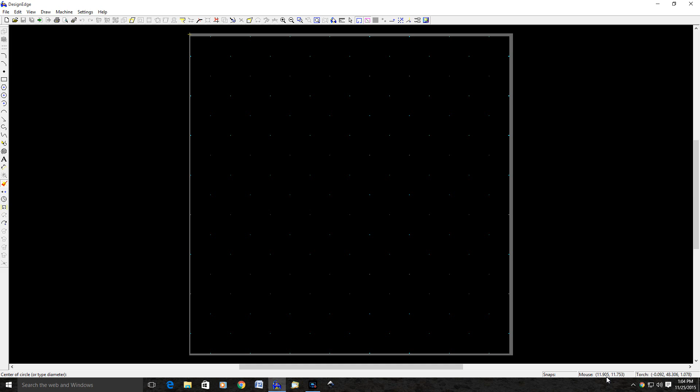Okay, all right, first off we're going to start out with a circle. So we click on our circle here, and we go ahead and type in 2 inches and a 32nd as far as diameter, and we're going to go ahead and put that down on the screen.

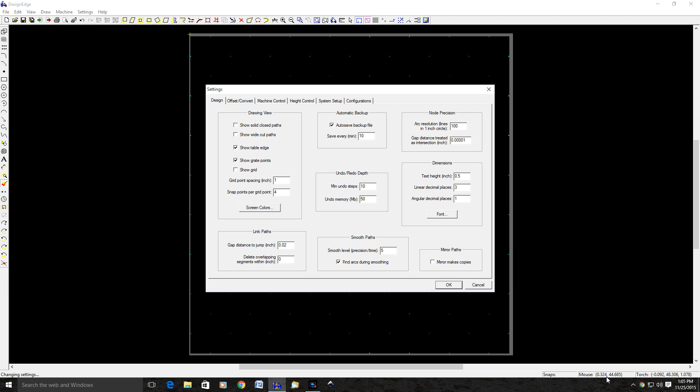I'm going to go ahead and go in here in my settings, and I'm just going to come out to design, and I'm going to unclick show closed paths, so this will just give me the lines for right now. We'll show the closed paths when we get a little bit closer to finished product here, because it does swap back and forth, and it looks confusing sometimes while you're going.

All right, I want a node to center that, and I just push center, and it creates the node in there. I'm going to marry those two together, or create a match, so that when I highlight one or the other of those two items, the node or the circle, I actually have them together. All right, that gives us our diameter.

Now the depth of our socket, the depth, how much we want to come down over that socket, and we can just, I'd say 2.5 inches is probably good. So let's create a square that matches that circle.

First point is always 0,0. And then we'll go ahead with the width, which is going to be 2 inches and 1/32, by 2.5 on the length.

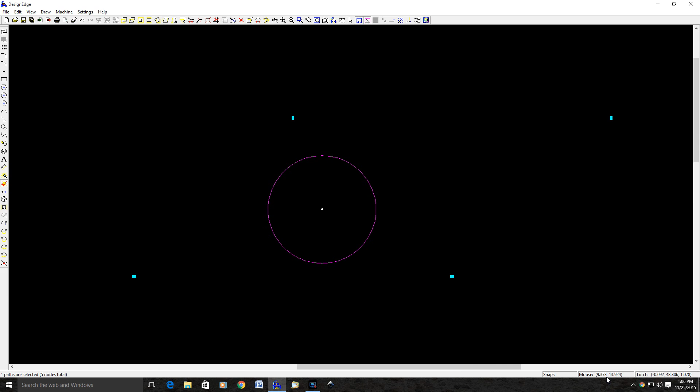All right, now we come out here, that's where our square is, and we're going to just bring this up close to our other item. We're going to put a node in the center of the box.

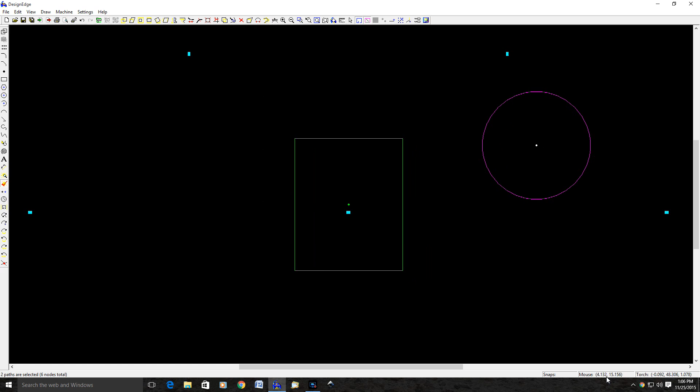And then we can marry those two as well, and then we can line up that with this project here by lining up the nodes. And you can just zoom in and line those up.

If you had an X and Y coordinate, you could also put that in there, but this is just quick to go ahead and zoom in, a couple clicks, and you're going to be ever so close right there.

I mean, we're making an auger, okay? Now you can see that the center of the box is not really giving me the total depth of that. I need to bring that clearance on down there. So I'm going to go ahead and move that down.

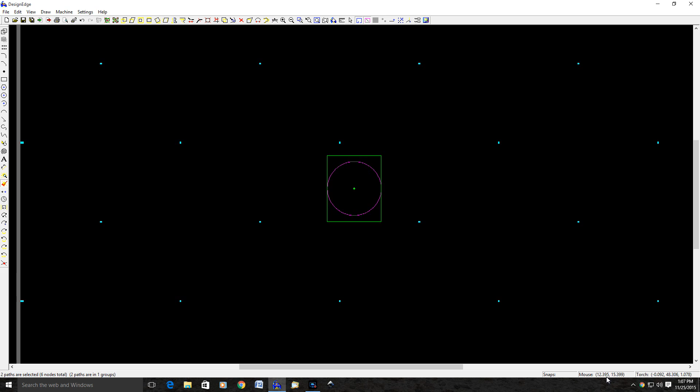And I'm going to bring it down here, but I'm just going to go ahead and slide it side to side until I know I'm matching up with the lines. There we go. All right, and then we just kind of zoom in and make sure that's lining up there. That's lining up there.

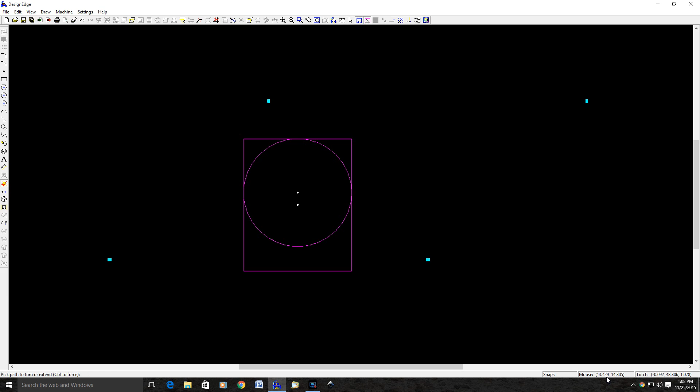All right, now to double test that there, let's go ahead and trim off this. Okay, trim off that, trim off that.

We can marry those together. Now we have one closed loop there. We have one green spot that's left up here. We can get rid of that. That's a closed path. When you've got your purple and it turns green when you highlight it, that is a closed path. And that's what we want for right now.

Now, that's our inside there. This is going to be open at the end, but we have it boxed off right now just so we know we have security on our radiuses around here.

All right, now we need to go ahead and duplicate this basically in a larger piece altogether. So we can copy this, put it over here, and we can go size on that, and then we can size this whatever size we want.

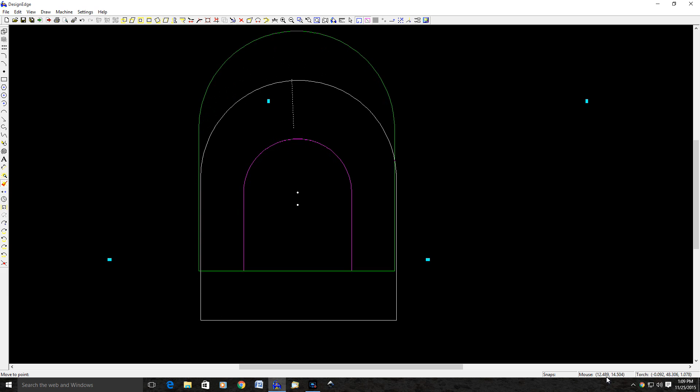Then move that over this. We can also move this down. We keep the wall thickness pretty close to the same up here at the top and side to side. We can even bring it down a little bit more if we wanted to.

All right, that's pretty uniform. But let's go ahead and give it just a little bit more at the top here, because we're going to be cutting out of it to put that socket in there. And I kind of like that right there.

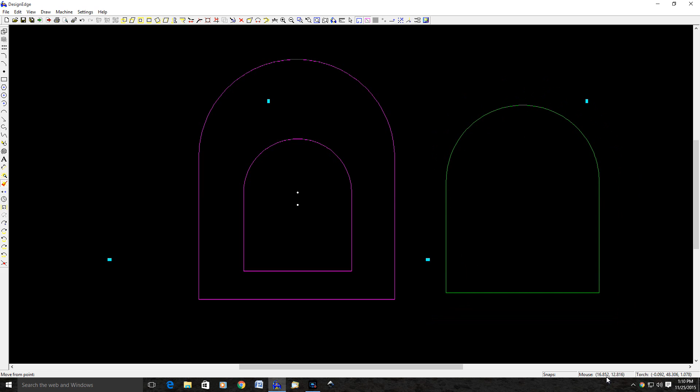Now our quarter inch plate that's going to sandwich around the side is going to be somewhere between that inside dimension and the outside dimension. So I can just copy another one of these and size it down somewhere in there, move it over here, and also size it up while I'm in here, so I know I'm going to have a nice weld bead along here, and it's going to hold it pretty good. I kind of like that.

Alright, let's go ahead and draw a line. You can punch in the coordinates of a line, or you can actually draw it, hold it until it is straight, unbroken, and it actually creates a solid line level.

Alright, I had a little interruption there, but I'm right back. The line we created will give us a break line that we'll be able to move across all of our pieces right here, so that we can create an open bottom, basically what we're doing.

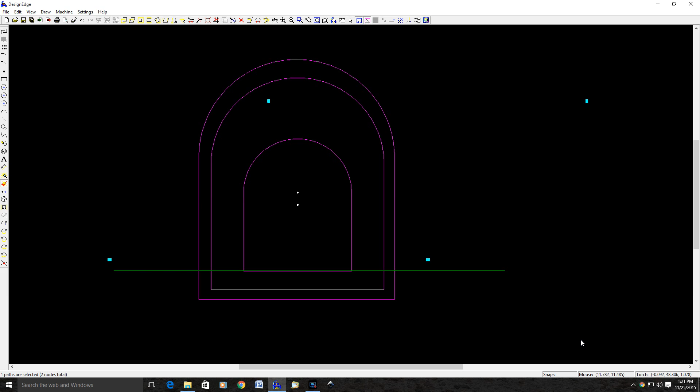So we laid that over, and you can see I'm slightly above that line, so I know I'm crossing all over here. I'm keeping this simple so we've got our pieces. All of our pieces are right here now, with the exception of not fitting our socket in here at the top. So let's go ahead and measure our socket.

We're basically about 800 on the width, and we want to go three-quarter inch deep, and 850 on the width should give us enough.

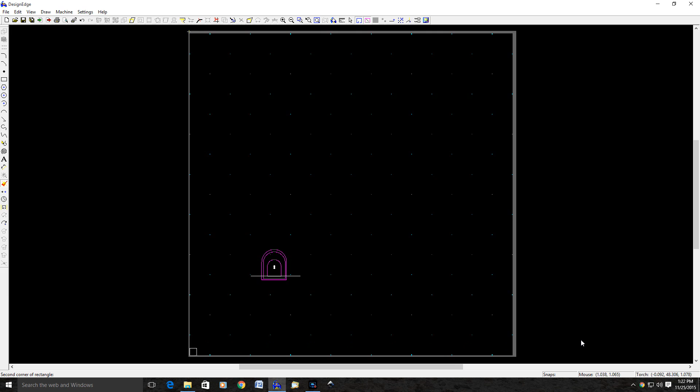So let's create another box. 0, 0, enter that, and this just pinpoints at the corner, and that's how your box is. So it gave us that center point no matter where it is.

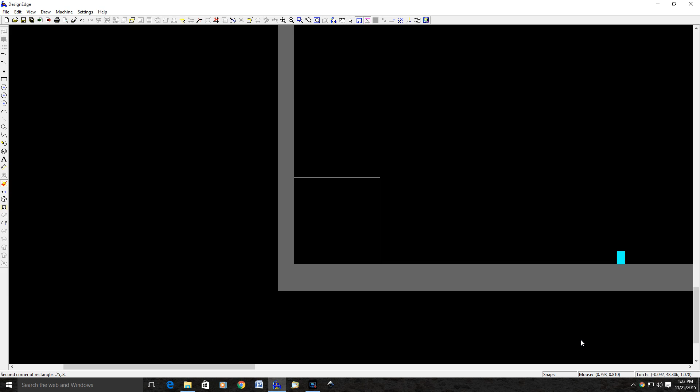Now I'm just going to type in the rest, and we're going to go three-quarter on the width, and what did we say? We said three-quarter on the width, 850. 850 on the width and three-quarter on the height. Type it in right.

Alright, there's our square now. Now we can go ahead and move this up to the top of our center here.

And if we go like this and put a node in the center of that, there we go, and we marry that together, then we can go ahead and draw one last line here vertically.

There we go, and we move that on over here. Now we wanted to line that up basically with our center, and I'm just grabbing one of those nodes and bringing it over here, eyeballing it to where I know it's close enough. For the tolerances we need for a welded impact socket, we're doing great.

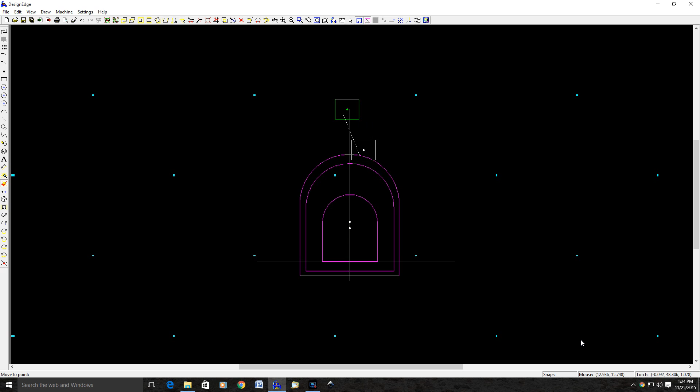Alright, let's move this down here now, and I want to line that up in here. I'm going to leave this protruding outside this corner here. It makes it easy to go ahead and trim lines. Alright, now we've located where our socket is going to stick down into the top of our holder here.

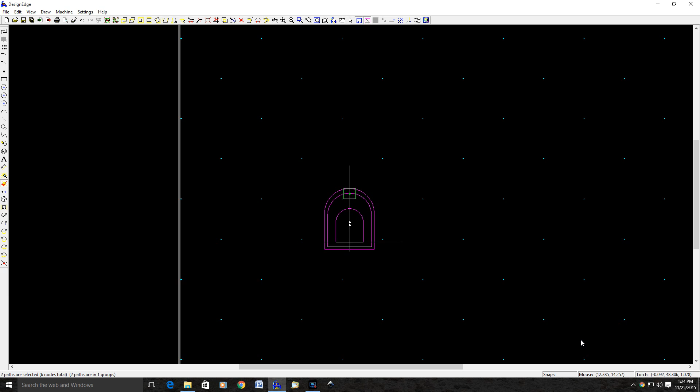Now let's go ahead, I'm going to zoom in on this whole picture here, and I'm just going to grab my scissors up here, because this lets me trim off what I don't want. First off, this vertical line serves no purpose for trimming, so I'm going to delete that.

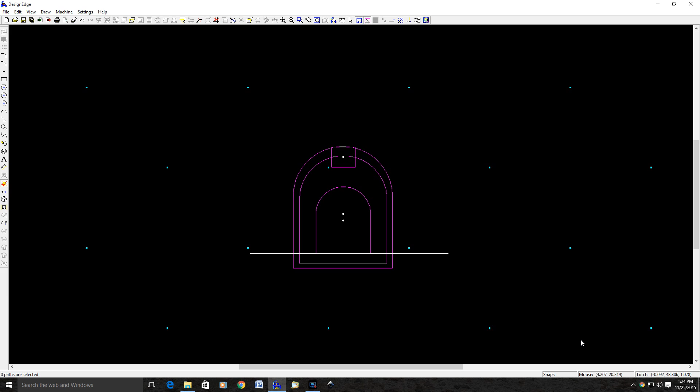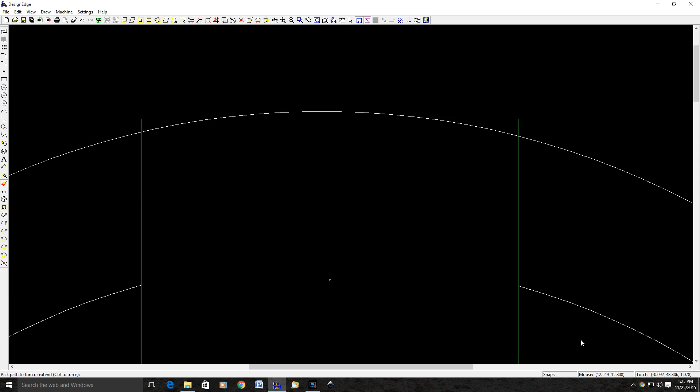Now I can grab my scissors, and we'll start right down here at the bottom. We're not going to need that line, or that one, or that one. All of it's open here, that's open, that's open. We're not going to need that one, or that one, or that one. That one, that one, all of those.

Alright, before I cut anything else loose, I'm going to go ahead and grab those and delete those. Delete that.

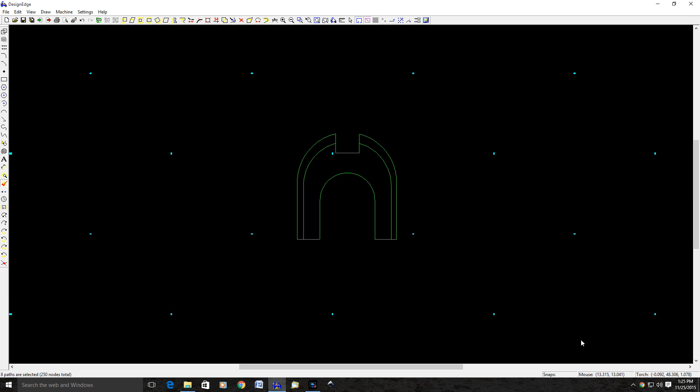Okay, I want to pair this, copy this before I delete anything else, because we're going to have two drawings used out of the same thing here. One is going to be our outside shell, the half inch thick, so we will go ahead and finish cutting that out. Actually, we can just delete that line, delete that line.

And that's our 1/2 inch piece. Now we need the 1/4 inch pieces, which are going to be deleting the outside. We're going to go ahead and delete that, delete that, trim that, trim that, trim that, and the last one there.

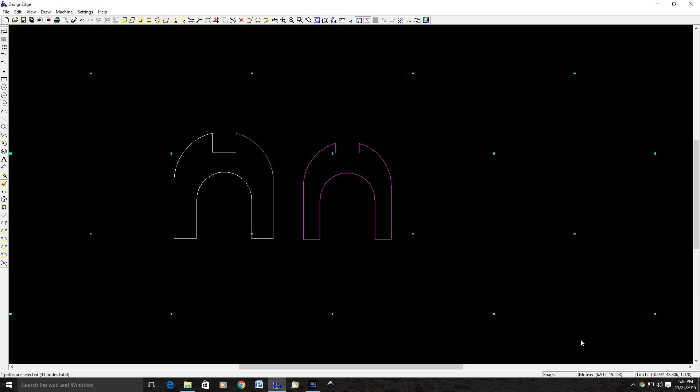Now we're going to marry. I have one piece of this whole thing highlighted, so I can hit marry. There's that part, and I can highlight this one here, marry there. There's our two parts. This is going to be 1/2 inch, this is going to be 1/4 inch.

All right, so let's get our materials set up. Now we need to create cut paths, and that's as simple as coming up here and going convert to cut path, and depending on where we want to go ahead and start, I'm just going to start down here on both of these here.

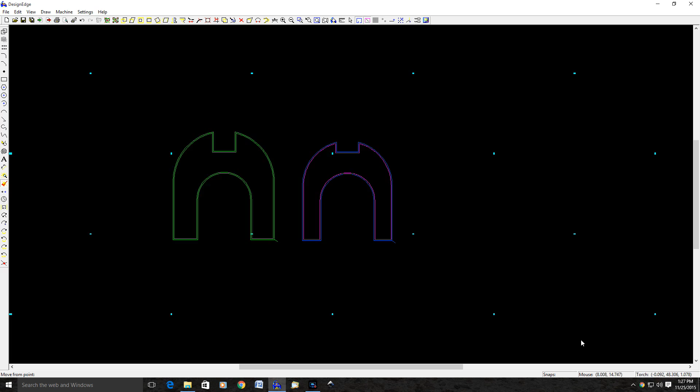I'm going to marry that so that the cut line and the part itself stay together, both of those. Now when I grab it and I move it, it moves together. Let's go to the table, and we're going to start playing with setting up our material there. Then we'll come back and set our cut path in relationship to the table, and then we'll get cutting.

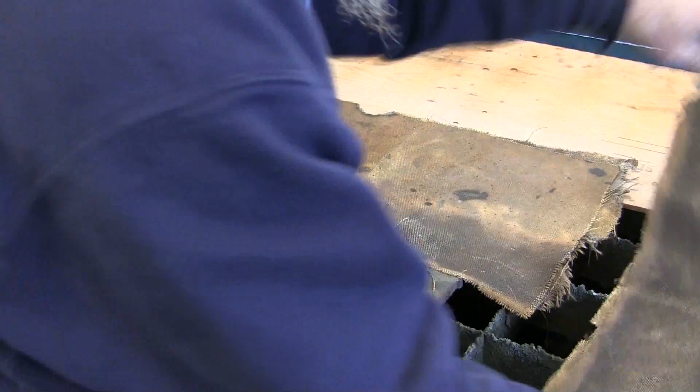Alright, I got a piece of 1/2 inch up here, and I got a piece of ply. I put the plywood, and I use these old curtain pieces that I trimmed off of a curtain after I used it to blanket a part for me. All I do is use those to control the draft, so it focuses the draft of where the cut is. Most of the time I can just run my lower blower and not add the noisy one on the starboard side here.

Alright, we're going to go ahead and cut out our piece, and I think I might just put it on over here into this corner here.

We do need to add a ground. We're grounded through the table, but sometimes through dross and roughness and just little pinpoints, you don't get a really good contact. So I always like to add an extra ground. It's added at and where the ground comes and mounts to the grill, like you're supposed to when you assemble a PlasmaCAM. This is an accessory, and it lays into the trough, and I keep it out of the way so it doesn't drape over any of the areas that the PlasmaCAM travels or would crash into.

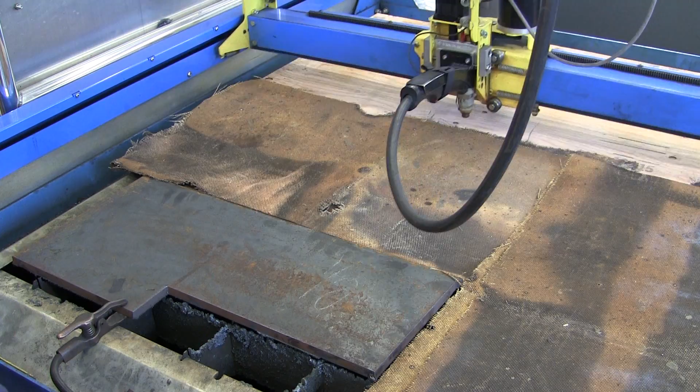Okay, now you want to know how I go ahead and put a piece of material on the table. I can bring the cutout and put it in place, or I can put the cutout on the table if it has to, and then move the material around on the table to cut it out. But what I normally do is come on down to where my material is, and I'm going to mark this lower corner down here. Roughly, give yourself an extra 1/8 of an inch of material so you know you're inside.

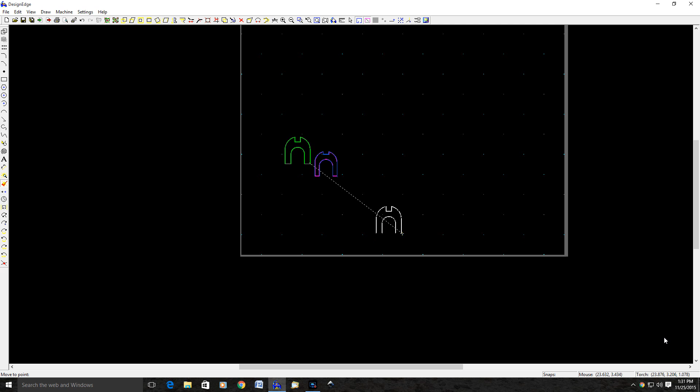All right, now we're on the screen here, and we bring this part. We can click move, and then we can bring that part right on down here, and set that in that location, and we know that we're going to go ahead and pierce and come in and cut that material. Now it's a little bit close to this outside edge, and it's going to cut clockwise around this part. Then I come down here, it's going to be cutting down a really skinny part here.

And I want a little bit of strength on the outside. I don't want it to be so close to the edge. So I'm just going to give myself a little bit more over here, like that.

Alright, now we need to go ahead and go into our settings. We got to set the thickness of material. I've been cutting out those plant hangers and they're all 100 thousandths, so we need to step up here about 500 thousandths, and we want to go ahead and set auto shift, zero shift and auto arc voltage, so it controls the height control and all of that. And I know on 1/2 inch, the cutting is probably down around 20 inches per minute, does a pretty clean cut, I believe.

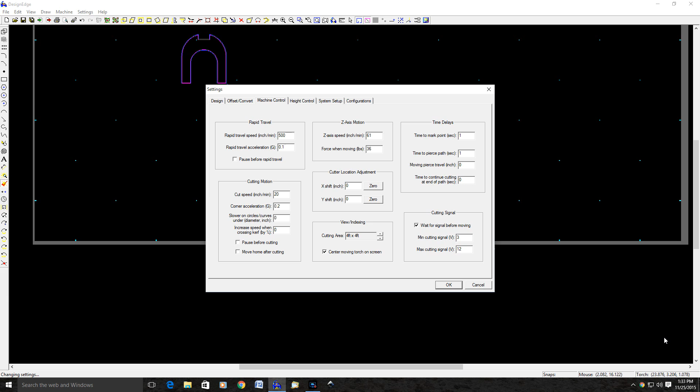And let's just go back. I want to make sure, because I actually carry a little bit lower height on the thinner gauge, and I want to go ahead and raise it up a bit. I kind of like about that. Let's give that a shot there.

Alright, so a lot of it's by memory. I mean, you can jot notes for everything that you've ever cut, and sometimes, depending on if you have a new consumable in there or an old consumable, it makes a difference. Or if it's dirty on the surface, clean on the surface, there's a lot of variables, but we're going to give that a shot there. Alright, so let's get some power here.

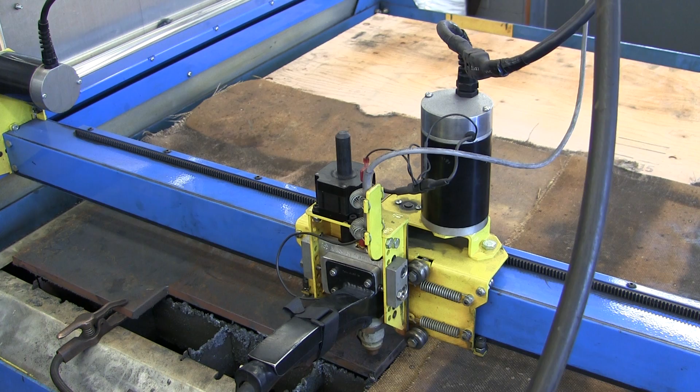And our airflow's on. Now, I'm just shutting off my auto cutting, and I'm going to click start. This will go ahead and run it through - that's where the pierce will be, and it's going to run through its whole program. I can speed this up since I already know where it started, so we don't have to run through the whole test. I'm happy with that, so we can close that out.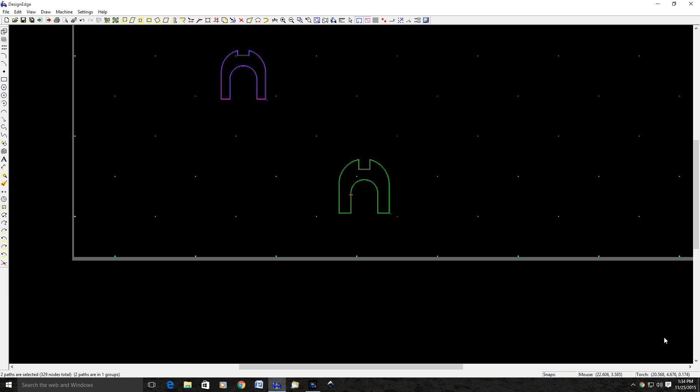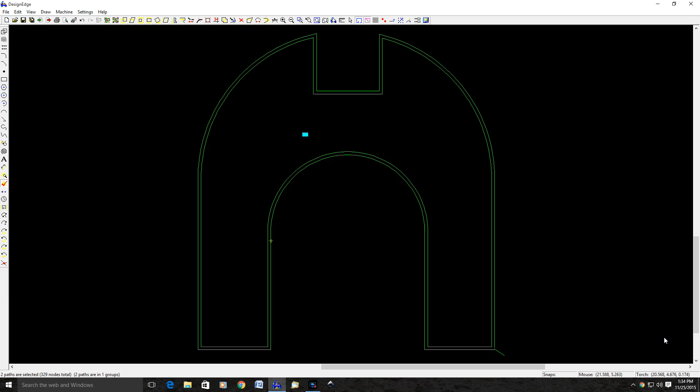Alright, now I'm going to come in here because we can focus closer on centering that part, and the part cut on the screen will follow the cut as we're going. I'll turn the auto back on. We'll give a little ventilation on one side there. I think that should be adequate for your viewing.

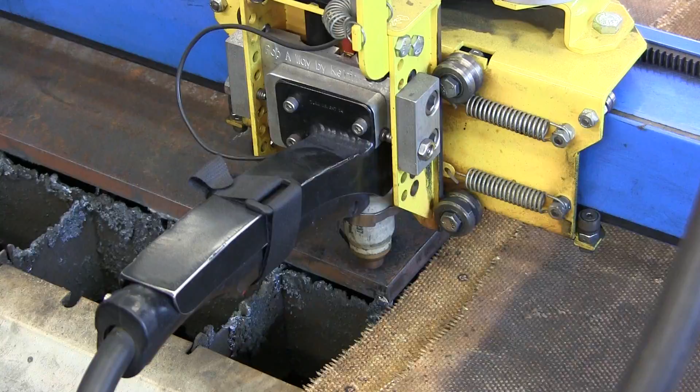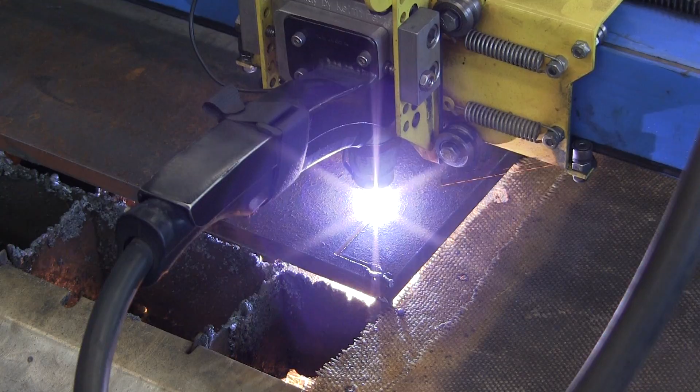Now I'm staring down in there, and that 20 inches a minute really does leave me a good finish. That's a little socket area.

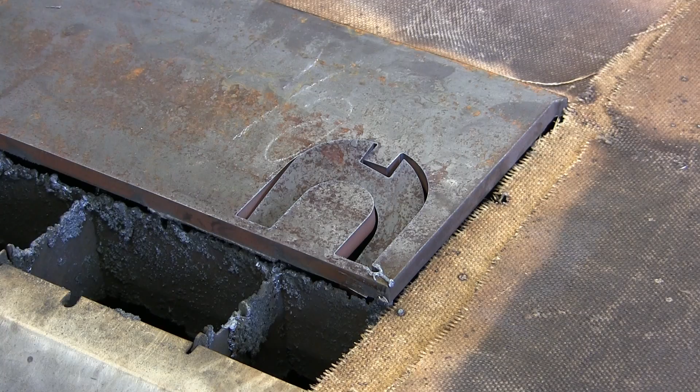Excellent. Okay, bring it up. Move it back out of the way here. Alright, I'm just going to reach in here with a magnet, I think. There we go. Okay.

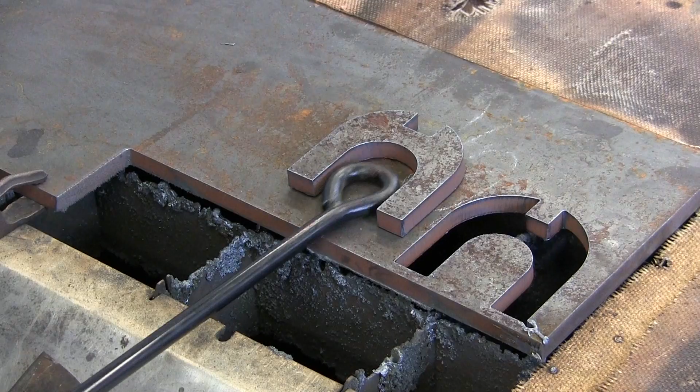Okay, that's it. That's going to be a nice fit right there. We did good. Alright, here's the socket - that looks dynamite.

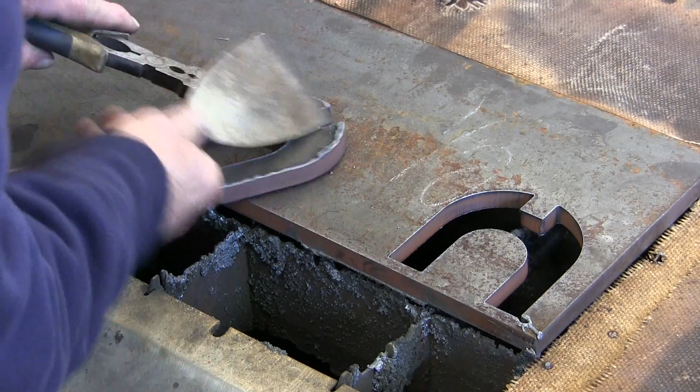Alright, let's see what we got. Not too much dross on the back. How does that chip off? Does that chip off pretty good? Oh yeah.

Okay, I like that. Now let's go ahead - I'm going to put a piece of 1/4 inch up here, and we're going to cut the other two pieces and get this welded. I'm really anxious to get out there and give this a try in the ground.

Alright, we're getting ready to cut out our two 1/4 inch pieces. We got the material up on the machine, we got the ground on. Alright, this is our drawing. We moved it down - there's where our cutter is in relationship to the table.

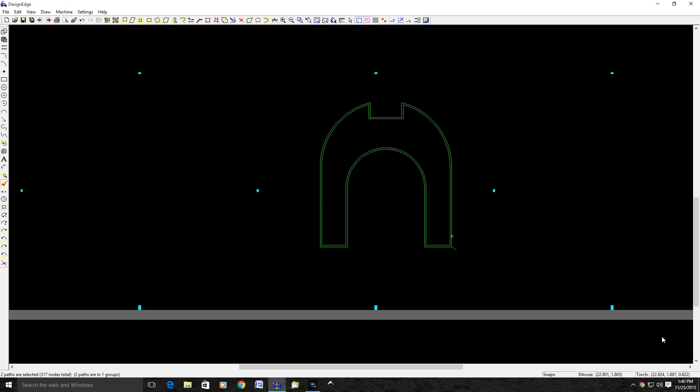Now we want two of these, so we go ahead and hit copy, put a second one over here, then highlight both, and when we hit cut, we can cut that. Now before we do that, we have to go back into settings, go into height control.

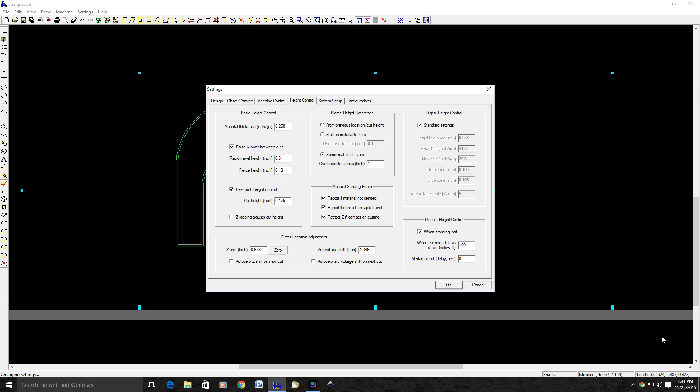We're going to knock this down to 1/4 inch. We're going to go ahead and reset our zero and zero there. We'll keep that same height, and our cut speed we can increase now - I'm just going to go ahead and hit 40 in here.

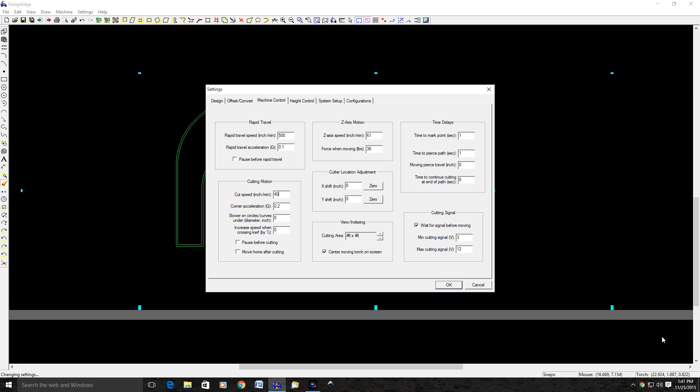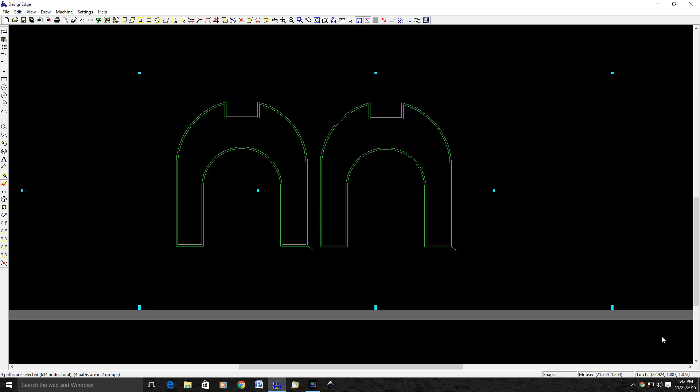It's a good, comfortable, clean cut, and that's what I'm looking for - the best edge is what I'm looking at. I'm not looking at cutting out the fastest parts, it's just the best edge. 40 on 1/4 is good, 20 on half is good in general. If I was going to be doing production, I would want to tweak that out to where I am creating a more profitable or less costly time and speed. Alright, we're set, we're good to go.

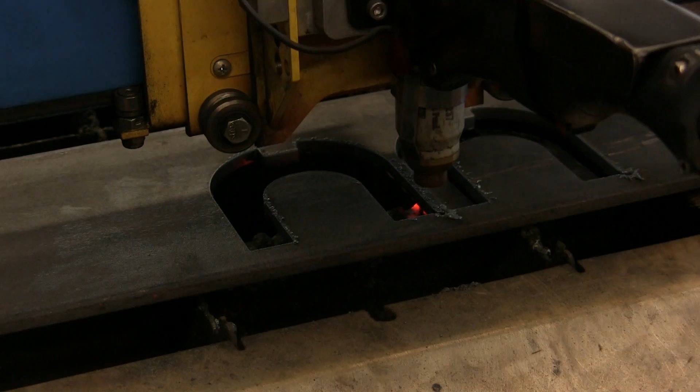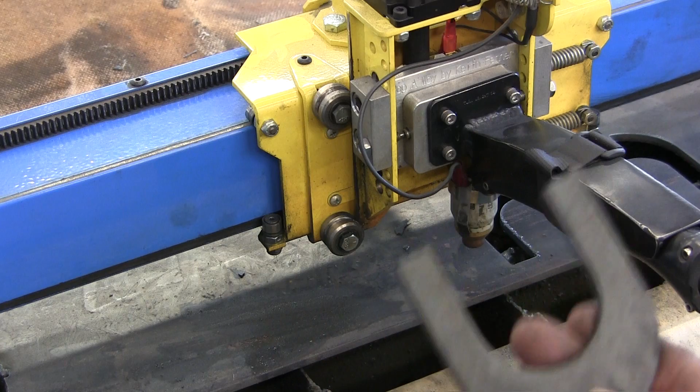Okay, hang on, I gotta get that. Alright, did you see the mistake? Okay, I'm not cutting out mini horseshoes - I'm supposed to be cutting out houses with no door. Alright, let's get these cut out here. Let's go ahead and move these where they need to be.

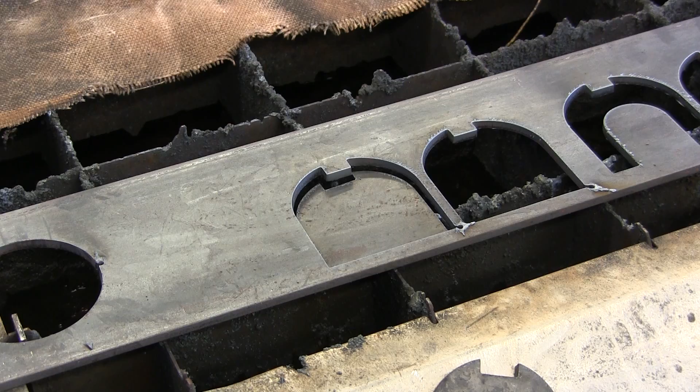Okay, we got our sander here. I'm gonna move our coffee over there. Alright, and we're just gonna hit these edges here where we're gonna be welding.

All right, they'll be able to stack up here, let's just see. We're gonna put these in here, just for kicks. We're not trying to line them up or whatever, we just want a thickness thing here. Is this gonna slide in there? It's tight, okay.

We may want to give it a few thousandths on the thickness, so I think we're going to get a couple pieces of strapping material or something, because we want that to go all the way down in there so it's buried right in there. Just a little something to hold it apart, and our socket is going to be able to fit right there in the middle, be welded all the way around.

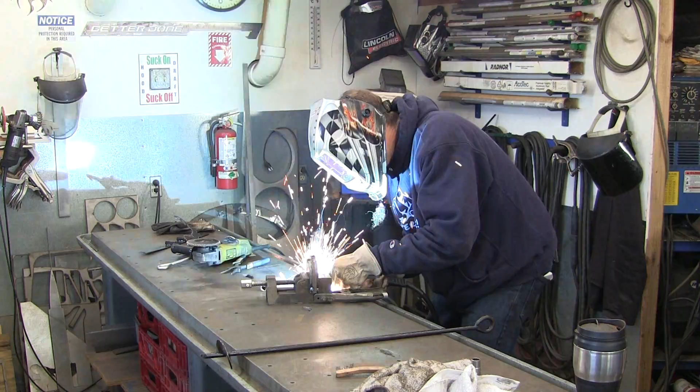We're going to loosen this up a little bit. That's pretty good, huh? Okay, now we're going to break it apart. It's loose on one side there, but it's grabbing on the other side there. Okay.

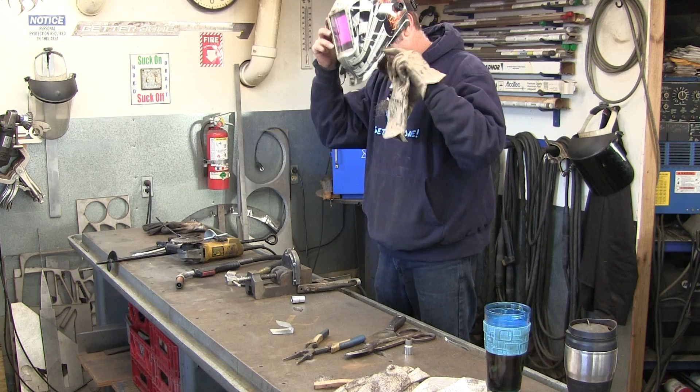Okay, I'm just going to put it on the helmet. Okay. Got it down here. Right there.

Looks pretty straight. I'm just looking for a little leverage here. There we go, just pull it down. Okay.

Put on a fan here, get a little ventilation. Don't need to be breathing extra smoke here.

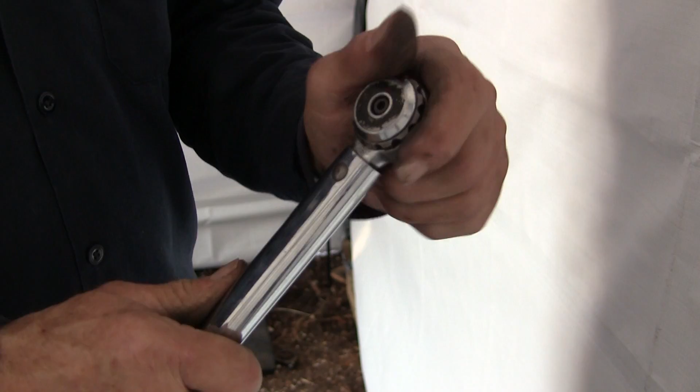We gotta go find out what's wrong with this. Well, that's pretty cool. I pulled that off, and there's a little roll pin in there, and it came out, and it holds a spring, and when you flip it from one side to the other, the spring rocks the ratchet. All right, so it's not broke, it just came loose, and I caught it in time.

All right, now I can put my hand back on the top like I had, and that's what happened, is that screw wasn't tight enough.

Feels like we're down in the sand now. If I had a weight or something on this, it'd probably go down a little faster with the helix.

Something a little crunchy right there. I sprung into a root one time, and that could have been a root too.

All right. We're going to have to get our hammer to tap that loose. I didn't sand the little BB off the side of the weld there on that one.

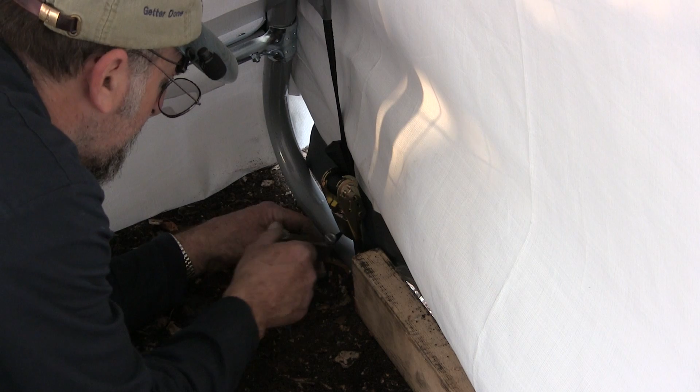All right, with our helical down here to the ground level, we kind of like it like that, because we're going to anchor that pipe with this loop. What we do is we go ahead and have this loop going through here, and then this arch holding the pipe, and that grabs a hold of the pipe, keeps it from coming in and out. Of course, the anchor holds it from coming up, but we also are holding this thing in and out, and I've found that these muffler clamps really work great.

So we just go ahead and we go like this, we bring this in, we're going to slide this whole thing in tight against that now, and we'll just rotate that like that. The 2x4 is holding our span exactly perfect. They want 12 inches or 12 feet to the outside.

So we got that going through like that. And then we got a muffler clamp like that.

Of course, we were just dismantling the other section there.